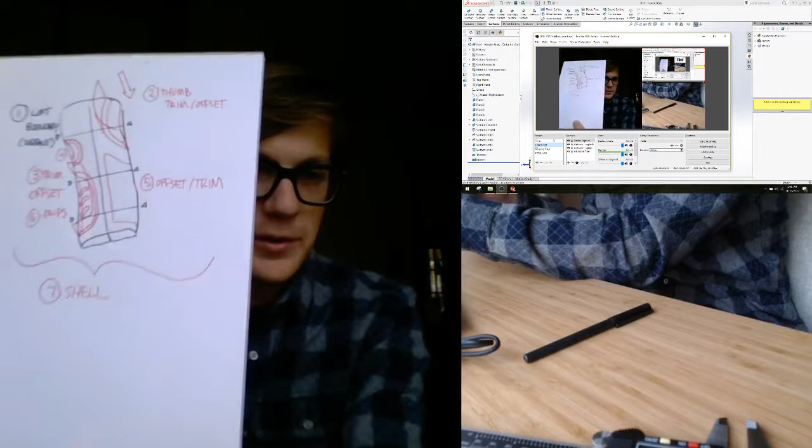So I'm going to do a few more of those in a maybe shorter video, just to build on part B before I take off. So let's jump right into this and get back into Solidworks. So here's the handle. Again, I did a quick mirror just to show you where we're eventually ending up. I'm going to delete this mirror feature because we don't need it yet.

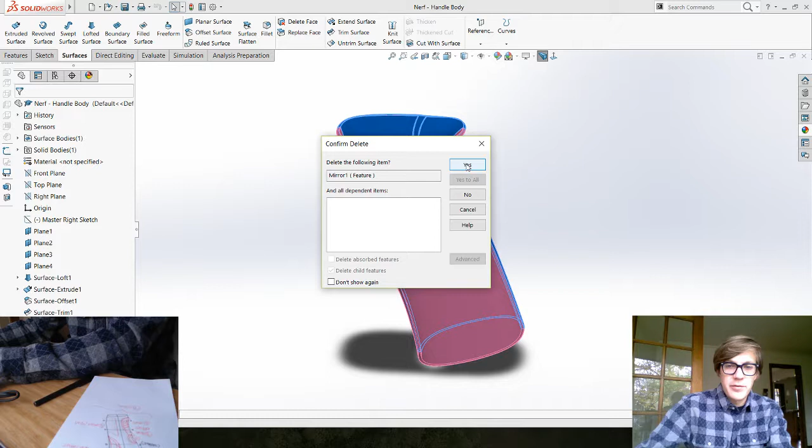And just like in the main body build in video part A, where we were shelling often to make sure that the shell would succeed, I'm going to continue to knit my surfaces and also try a thicken to make sure that those two operations, which get me to where I want to be, resolve. So I've got a couple other areas. Let me just see in my desk cam.

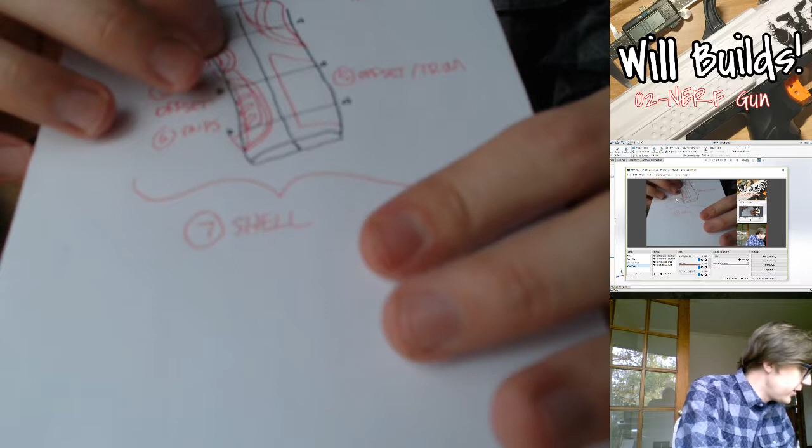Yeah, so I'm going to try and do maybe this trigger area, because it's a little bit different. I don't think we're going to do exactly an offset. I guess we could try it. Maybe try a different way of building this surface number 4 here. So let's see if we can get through that in about 10-15 minutes. Back to my display capture. Same basic setup here.

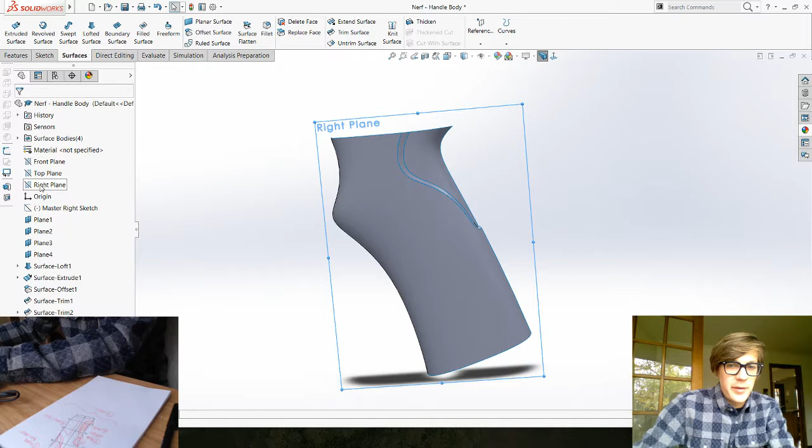I'm going to sketch on my right plane some of the lines that I'm going to use to trim out that surface. And actually, I might try something different here. We've referenced the idea of a master sketch a couple times, putting multiple lines that we'll use for multiple features in a single sketch. So let's try that with some of these other features.

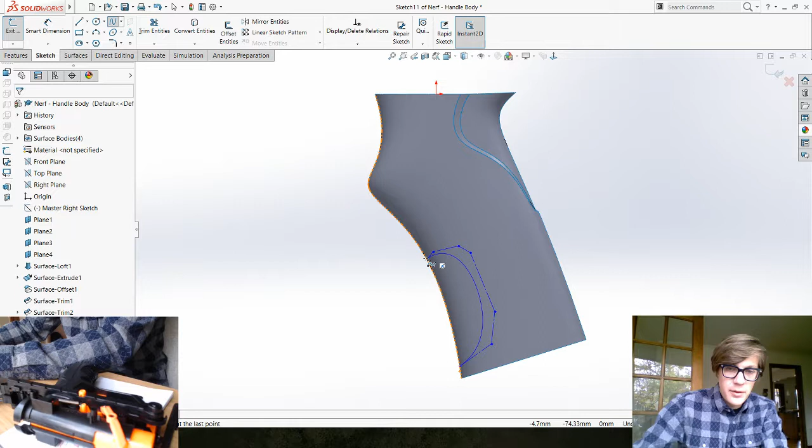Most of these surfaces I'm using to cut into my main handle shape have been style splines, and I think we're going to stick with that for now. Okay, so there's one. I'm going to find some quick dimensions here. Again, dimensioning these areas of your surface is going to be important for getting an accurate model of your handle.

Because this demo is more about technique than winding up with a dimensionally accurate model, I might skip some of the super detailed dimensioning or accuracy, just for the sake of showing you some technique. In general, that area of my handle is about 60 millimeters from here to here.

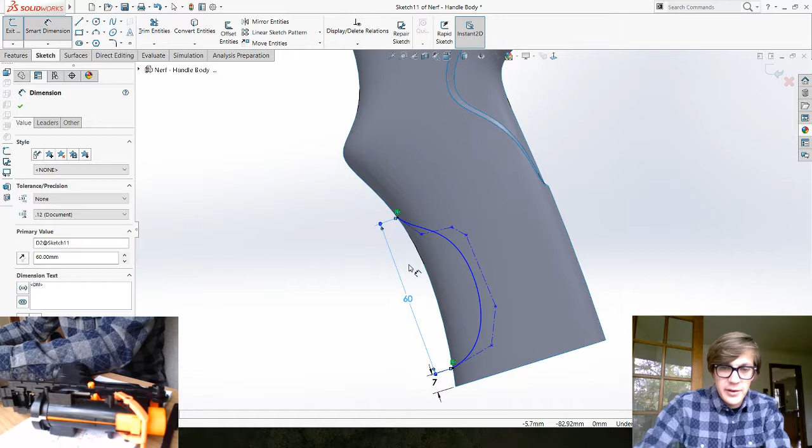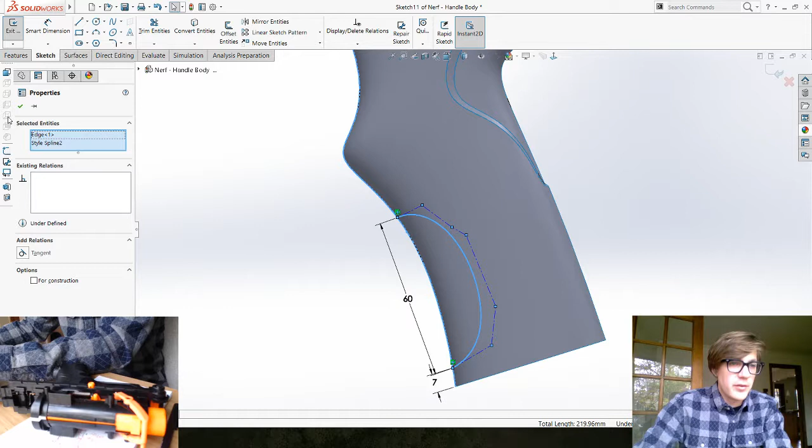And one more time, this is not really robust engineering level modeling. It's not exactly how I would model something in my professional design life. This is just in-process modeling for a visual reference, specifically to teach you the basics of building something with surfaces and solids and getting used to changing and setting up features. We'll talk about more sophisticated modeling next semester, stuff that's easier to update.

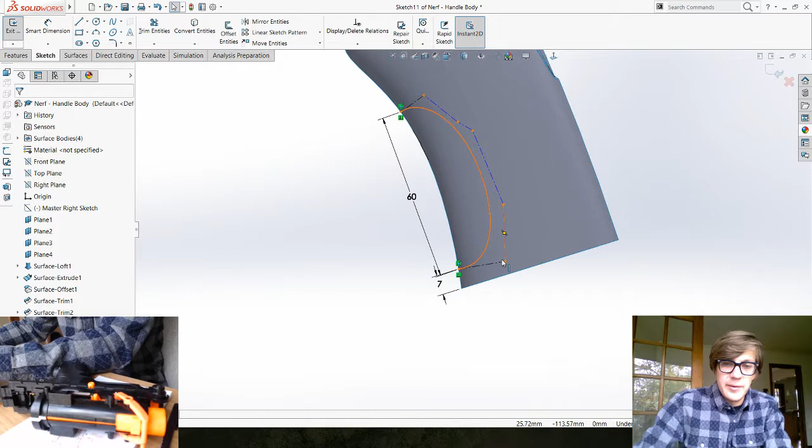Okay. For all these setups, I want to make sure that my curves are perpendicular to this edge curve. That way my features wrap around the front of my handle properly. If you notice you're getting jagged edge features on your surfaces building them this way, that's probably what's happening. I'm going to tweak some of these a little bit to give me a shape that's closer to the actual shape of my handle.

Oops. If for some reason these points aren't giving you everything you need, you can click your line, right-click on it, and say Insert Control Vertex, and it will let you place additional control handles onto your line. And yeah, I think it gave me another one here. I probably want another one in here too. Did it do it? I'm not sure it did. Oh, there we go. There's the other control vertex.

I'm going to add a couple more out here to give me some sharper corners. Okay, so you can play around with this a whole bunch and make sure that these corners are doing exactly what you want them to do. Drag this down.

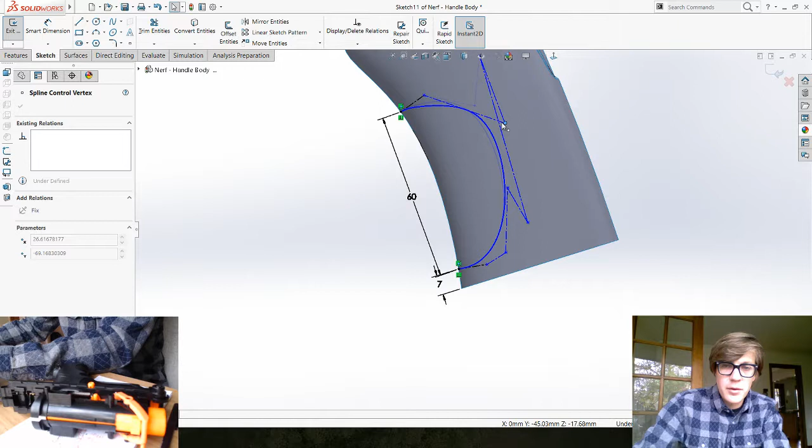Oops, it added a relation there. Okay. Anyway, I could fiddle with that until I'm happy with it. So that's one curve. As we saw in the last video, doing sort of like an offset of that curve can help with the double trim that we end up doing for like an outside surface and an offset surface. I'm going to build in a couple more of these curves that we need.

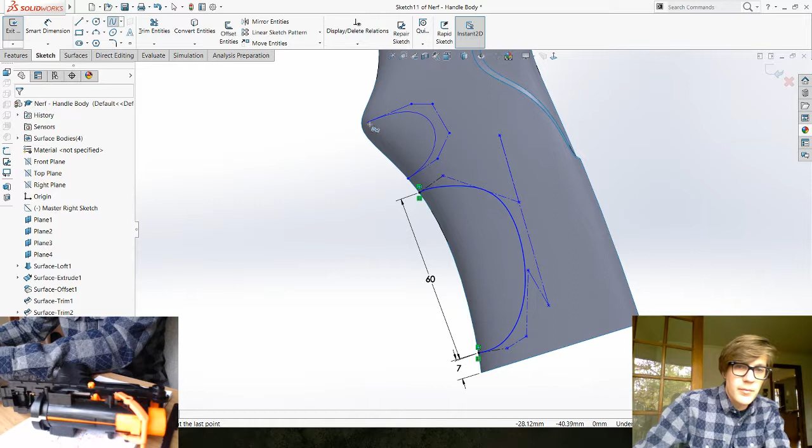So another style spline for right here. Again, just double checking that my curve, by clicking on like this control handle for the curve, says that everything is perpendicular. If stuff moves around, that's fine. You can always scoot stuff back where it needs to be.

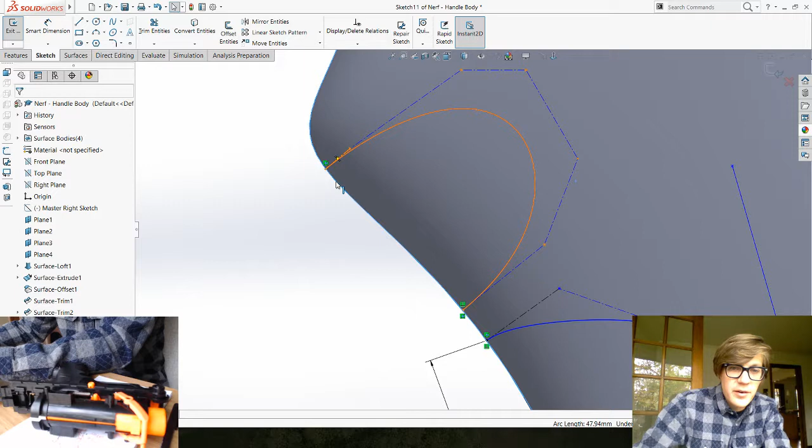Same for this. Oops, that's not the control handle. That little arrow is. That should be perpendicular to my curve here. Apparently I didn't pick it right. Scroll in and there we go, perpendicular. Alright, so that's probably going to come up here a little bit more. These are all going to be like cuts.

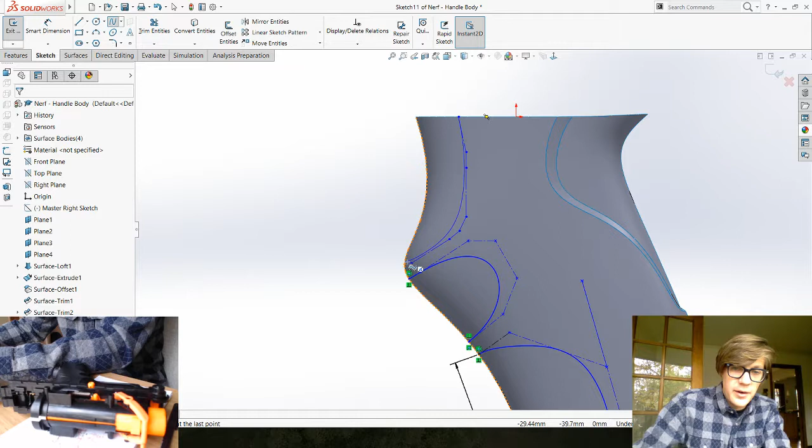Let's see, and I'll throw in another style spline, which actually is going to come all the way up to the top here. In general, if you need like a sharper curve, putting more points in that area will allow the curve to stay kind of sharper. And if you want a curve to be very smooth, you don't really need as many control points in that area of the curve.

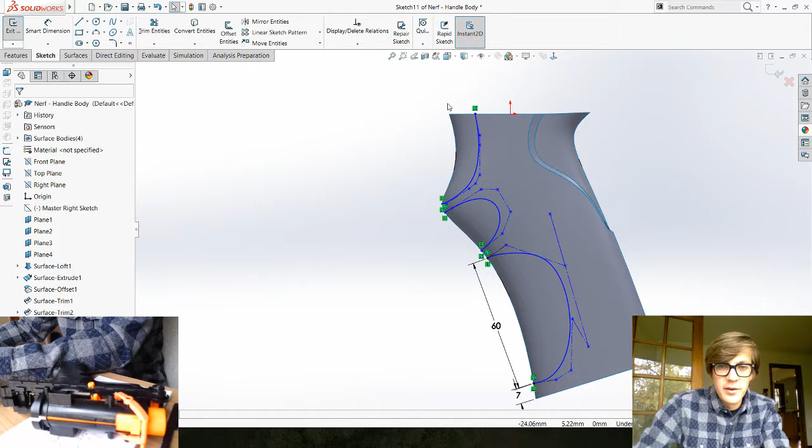Just scroll in and make sure I'm getting the line. Cool, I can get a perpendicular in there. Check. Okay. So we've got a few cuts here. I'm going to get out of this. Now, normally you want to like dimension, make sure this gap is what you're expecting, this gap is what you're expecting, that this is what you're expecting too. You can do it visually.

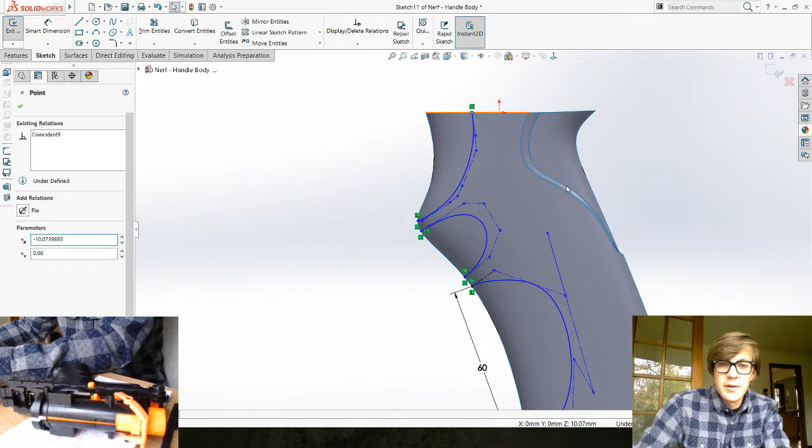Again, for speed, I'm just going to kind of eyeball some of this stuff just to get to the technique side of how to make these surfaces translate the way you want them to. So I'm going to get out of this sketch. And because we have multiple curves on this sketch, I'm going to go ahead and call this a master front of handle trim sketch, something descriptive, because I want these curves to stay on a sketch that I can change later.

And instead of using that sketch to do the trim, I'm going to make some new sketches on the right plane and then convert those curves independently, get out of that sketch. So that's one sketch right there. I'm going to do the same thing again. Convert this curve. Okay. Get out of it. Make another sketch on my right plane. Convert that other curve. Yep, that one.

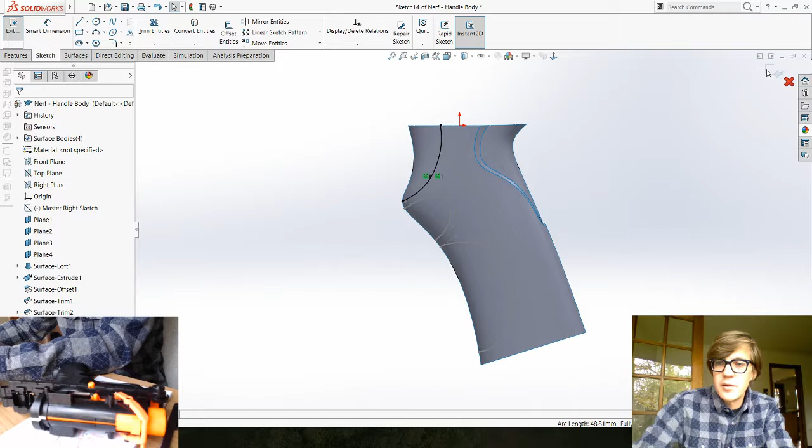Oops, I grabbed the line, not the curve. Just delete that and try again. Yeah, with the curve. Let's grab that sketch. I'm going to save really quick.

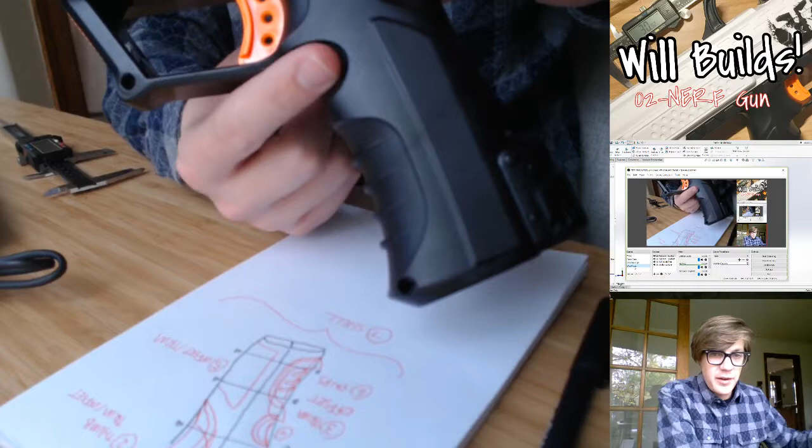Alright, so at least two of these surfaces, to go back to my camera, look like they are pretty much offsets of my existing surface. This surface looks like pretty much an offset. So does this one, minus those like ribs. This one is a little bit different, and we might set that up differently. So we'll start with the two easy ones, and then go to the trickier one. Let's go back to display capture. I'm going to hide my master sketch for now.

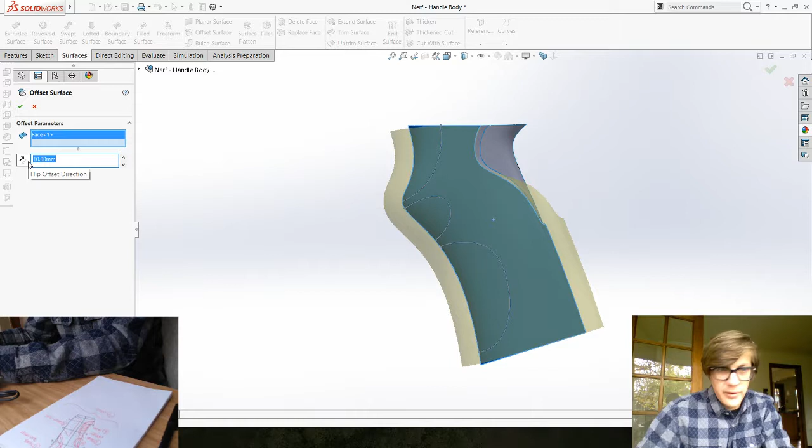And just start by going to my Surfaces tab, and actually we're going to make an offset first. An offset of this surface. We'll just say about, again, like 1, maybe 1.5 millimeters in, like that. So now I have like an indented copy of this main surface. Then I'm going to do some trimming.

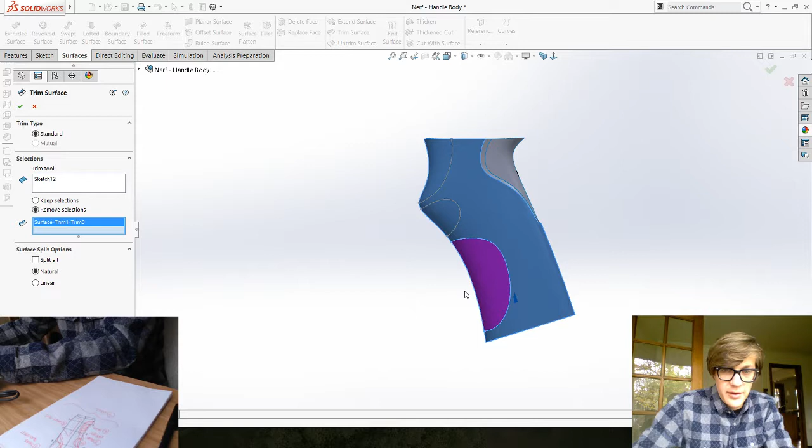So I'm going to, let's square up here. I'm going to trim using that sketch. I'm going to remove this area of my outside, and then this area of my inside. And actually, I might have to duplicate that offset surface a couple times. That's fine. Actually, can I pick multiple trim tools? No, it won't let me do that.

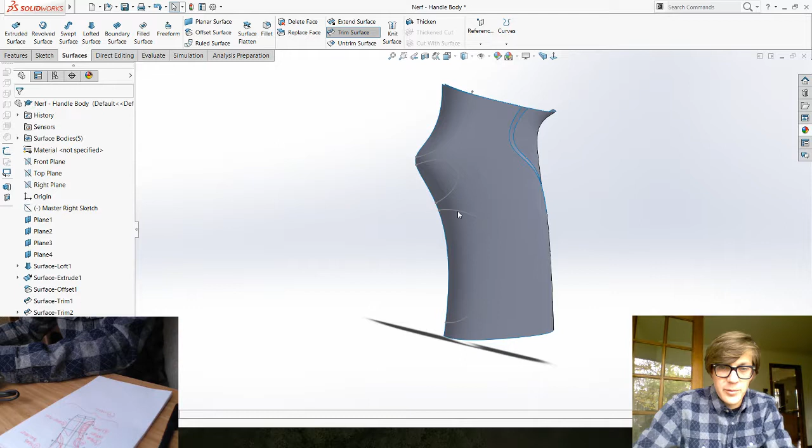Alright, the reason I'm doing this as like independent trims is that way if I need to delete or edit one, it doesn't blow everything else up. So let's try this one more time. My trim tool is the sketch. I'm going to remove this area of my outer surface. I'm going to remove, looking at the back side, this area of my inner surface. Right, like green check mark, and there we go. It's like an offset. That looks kind of how I expected it to look, which is good.

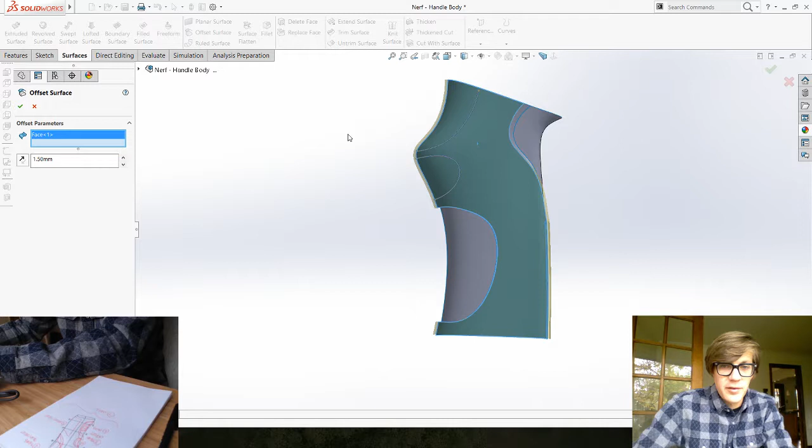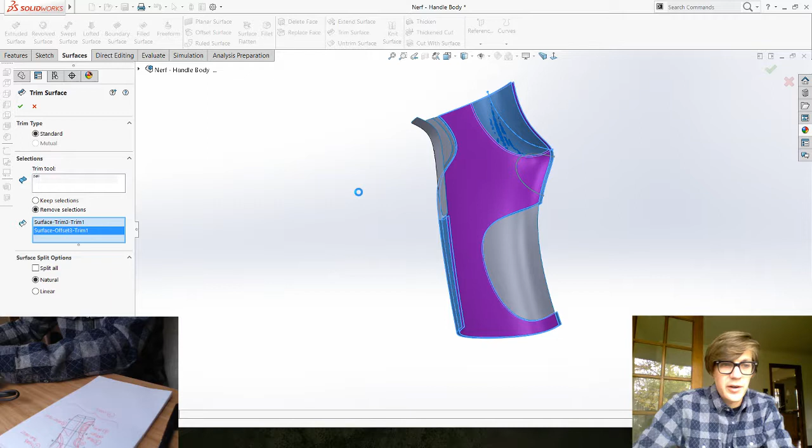We're going to do the same thing again with this curve up top, but I'm going to make another offset surface to do the trim. Okay, so we're going to trim the surface with my curve. I'm going to, again, remove this section of my outer surface, this section of my inner surface, right click or green check mark. Okay, now we're getting there.

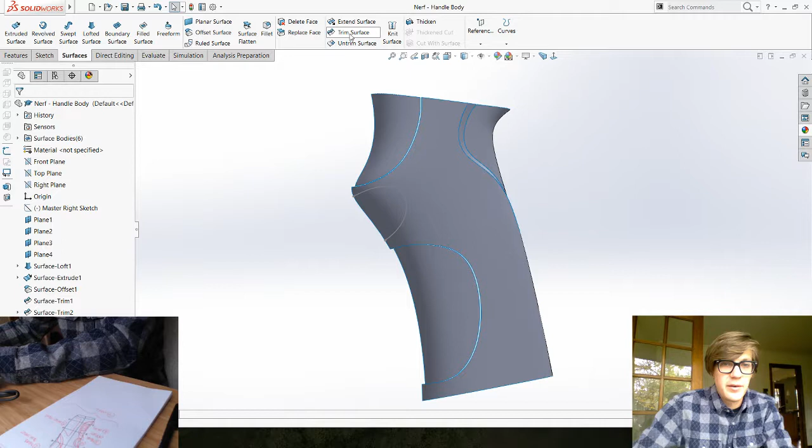That's looking pretty good. And you can kind of see this gap in between these two surfaces. I'm going to have to bridge with a loft. I'm going to save really quick. And then for this other surface, it doesn't look like an offset, so I'm going to do something a little different. I am going to start with a trim using this curve, and I'm going to remove this section here.

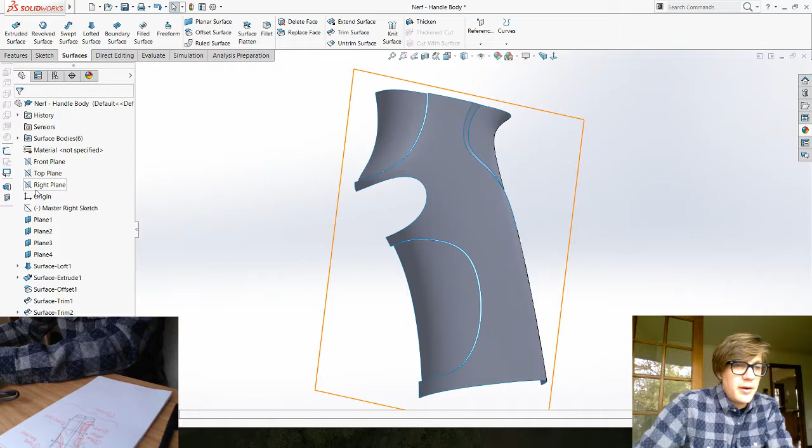But you'll notice because I didn't create another offset surface, I kind of have just like a hole in the front of my handle. I'm going to build that new surface kind of from scratch. So here's how I'm going to try and set this up. I'm going to sketch on my right plane, look straight at it. I'm actually going to draw a spline with the curve that I want this thing to have.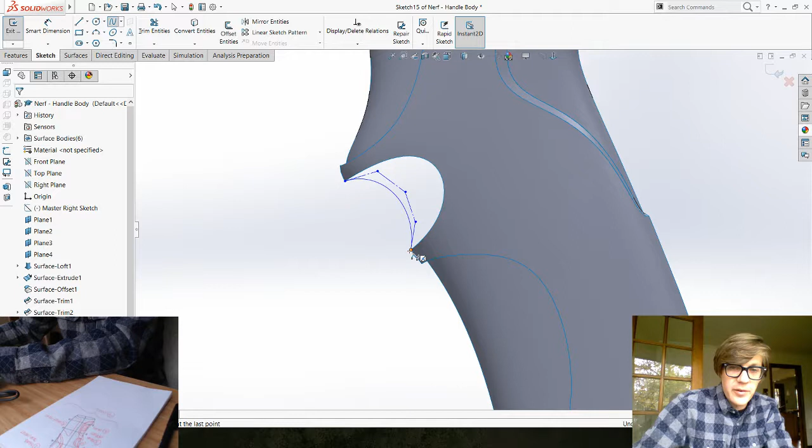Because it's not quite an offset. It's a little bit different. Okay, once I have that curve drawn, again, I might play around with this a little bit, try and make it as close as I can to the shape of my model. That looks pretty good. I'm going to get out of that sketch. And then I think I might have to make one more sketch in here to make this work.

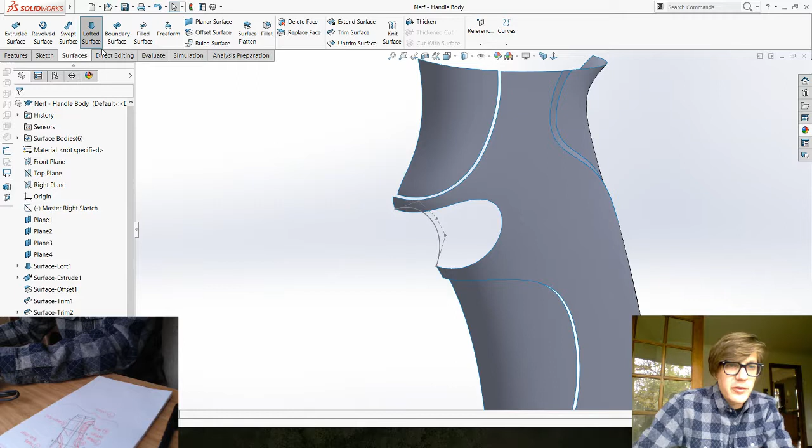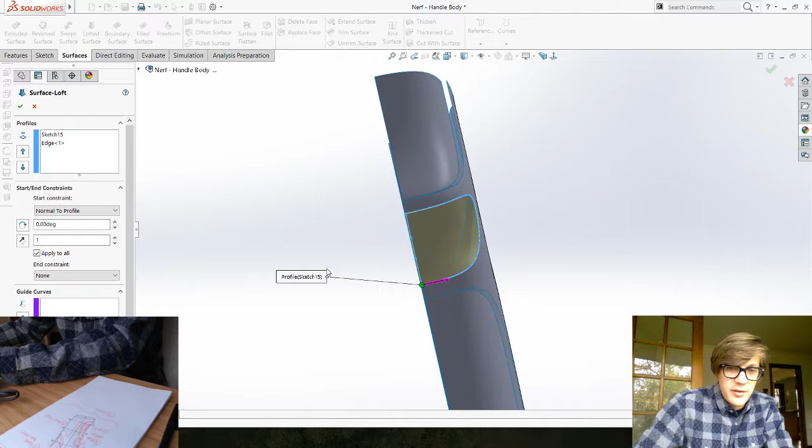Well, let's try something. So I'm going to save, go to my Surfaces tab, and I might try a loft first and see if I can get this curve to loft to this edge. I might have to switch the start and end points of this thing. Yeah, that's actually looking pretty good. For the sketch, I'm going to have a start constraint that says normal to profile to make sure everything stays nice and tangent across the front of this. And I'll say green check mark.

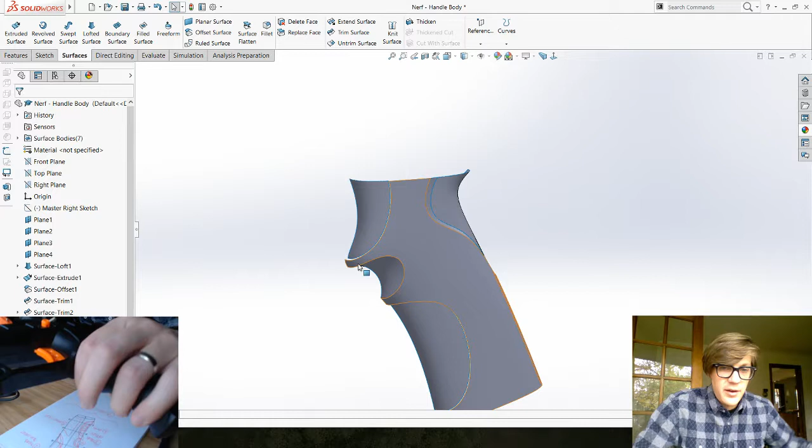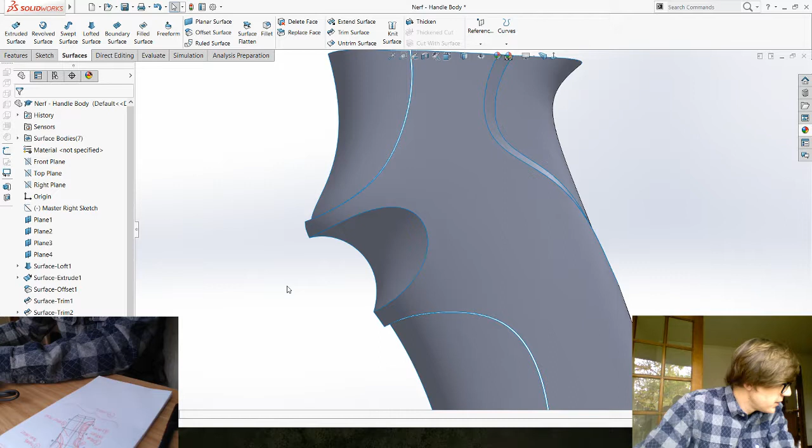Cool, actually that works just about right. So you can see it's a little bit different than an offset surface. I actually controlled that a little more closely because it does look a little bit more like inset on the handle than these other offset surfaces. So I guess the last piece of this puzzle would be connecting some surfaces. It looks like I could use a little offset in between here, but I'm going to skip that for now.

Let's do a couple of quick lofted surfaces to connect these areas of my handle that are disconnected. So I'm just going to pick that line to that line. And if these green dots, start and endpoints, are off, you can actually change them so they start and end at the same end of the curve. And that surface should resolve. Yep, that looks pretty good.

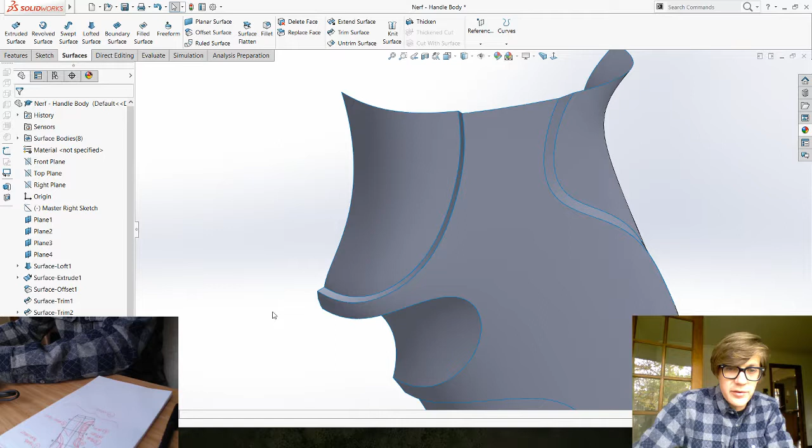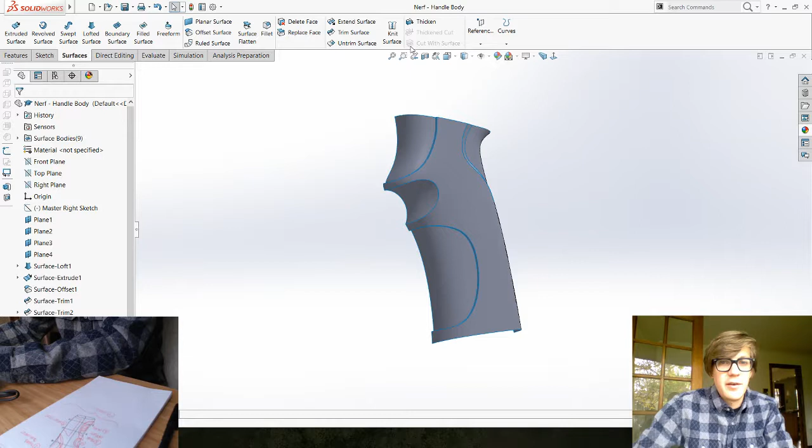I'm going to do the same thing down here between this curved edge and this curved edge. My start and end green points look correct. I've got a brand new surface inside there. Cool. That's looking pretty good. I'm going to save. And let's test our knit one more time. So I'm going to try and knit everything together. Gotta pick all these different surfaces.

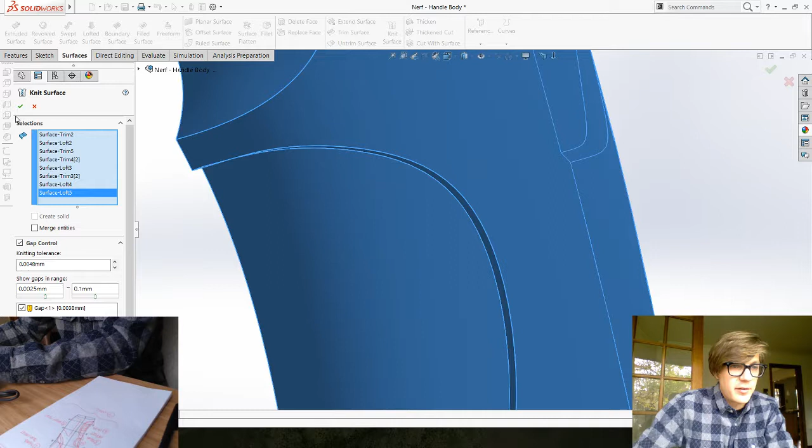I gotta make sure I get these little surfaces in between the edges that I built. Make sure any gaps have the check mark next to them so they're being filled. Little green check mark. It looks like everything knit all right. And then it looks like I have just the one surface body. This other one was a trim surface I used earlier that we're not seeing.

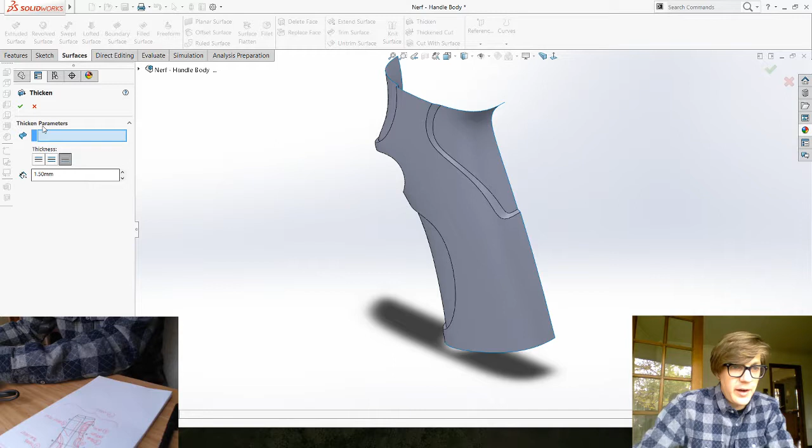Let's try our thicken. So for the thickness of the plastic, which I still haven't measured, let's say it's maybe 1.5 millimeters. What surface? This whole thing. Thicken it to the inside. Let's see what happens. Okay, it resolved for me. So there we go. We're getting there as far as building this handle.

After the thicken would be an appropriate time to go back through, because now we have a solid, to add some little fillets to the edges of this. Oh man, 0.5 might even still be too much. Well, add aesthetic fillets to the edges of this thing here. Oh, I picked the whole face, that's why. I just want that edge.

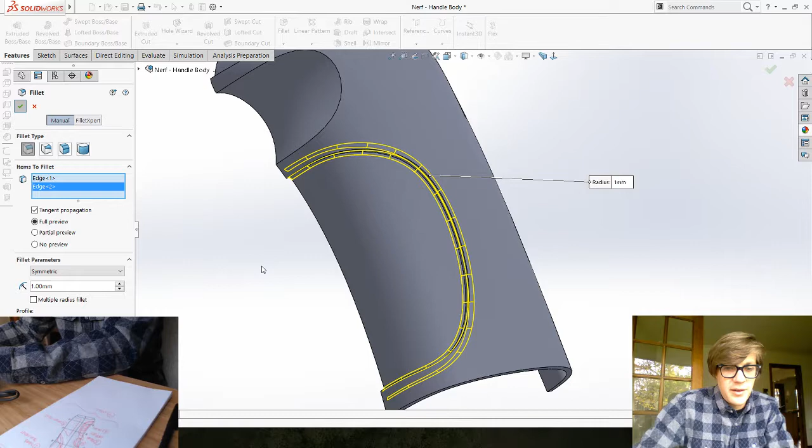Yeah, and that edge. I would do these kinds of fillets after the thicken just because they tend to mess with things a little bit. And apparently I picked an edge through the other side. Anyway, you get the idea. Do these kind of small fillets after you do the thicken and all of your main surfacing.

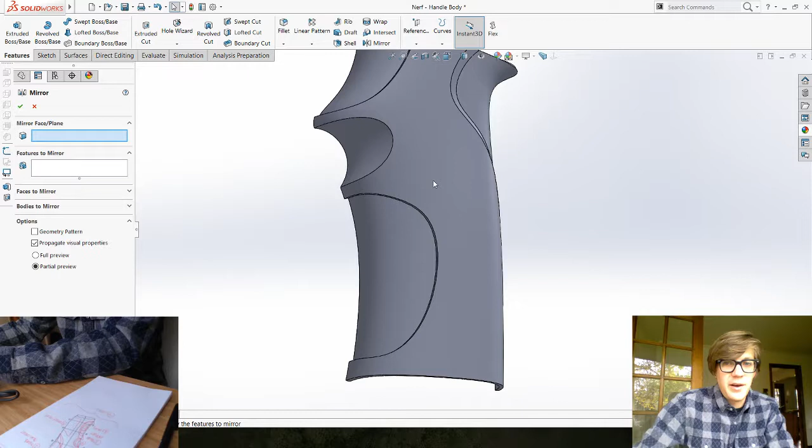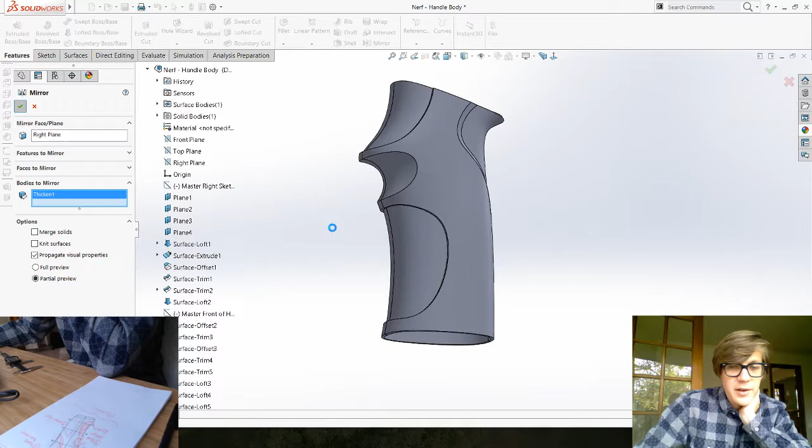So let me delete that really quick and show you a mirror to give you a little progress update on how this handle is coming together. Let's see, across the right plane. We'll mirror this entire body. Right click or green check mark to say OK. Oh, I'm trying to merge solids. I'm going to just turn that off if for some reason the mirror isn't working. These are going to be separate parts eventually anyway.

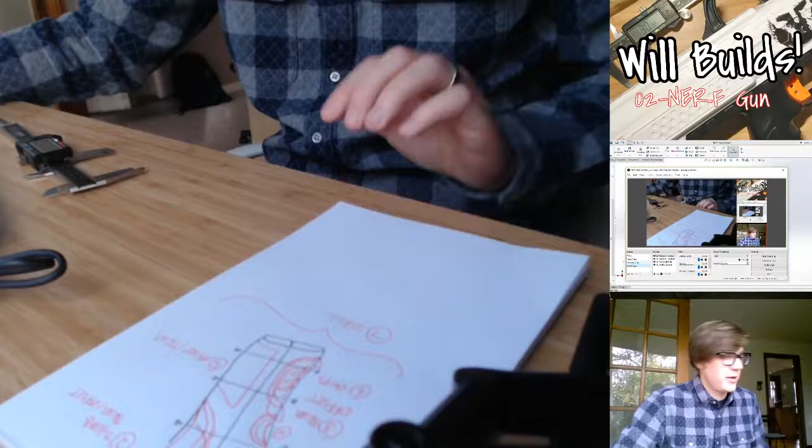And there you have a little more progress on my handle here. Now there are still a bunch of things I'd want to add, like some of these ribbing details on the front, finding a way to integrate, I guess we'll go to the cam, this component into the handle, sort of building the top end of my trigger area as well. But I think with the techniques we've covered, you guys have a fighting chance. So anyway, that's it for part C of this Nerf gun build video.